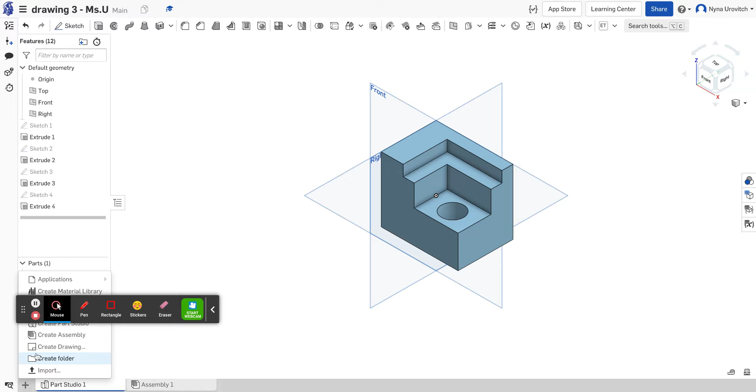So we're going to go to the plus sign in the bottom left corner, and you're going to go create drawing, and you'll go okay. We're going to select the part.

I'd like to spread these out nicely so we have plenty of room. We have the front view, the top view, the right view, and the isometric view.

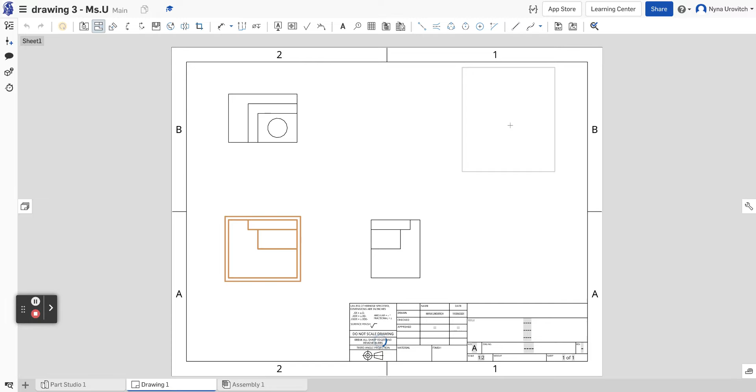We're going to start off by deselecting the projected view. Then you're going to go back to the isometric. We're going to right click and go show, hide, shaded view, and we're all set.

The next thing we're going to do is look for the hidden lines. So you're going to hover over the front view, right click, show, hide, hidden lines. And to the right view, show, hide, hidden lines.

Once there's no hidden lines for the top view, we're just going to continue and mark up the circles until we get all the center lines and center points.

We're going to go to the center mark and then you're just going to tap the outside of the circle, and there it is. Now we're going to go to edge center line for the hidden lines.

So I have one hidden line, another hidden line, one hidden line, another hidden line. Great.

The next step that we're going to do is we have to do the center lines across the circle. So here's one, here's two, and we just deselected the center line and our sketch is starting to look good.

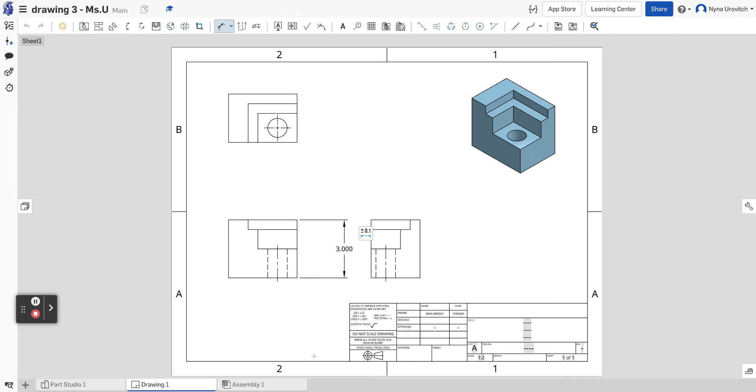So I'm going to go 3. I'm going to give myself plenty of space. And now I'm going to do 1.5 over here, and I'll do 1.5 or 1 over here.

Okay, so we just finished our first shape. And for our second, I'm going to do it across the bottom, again, to avoid the crossing of extension lines.

So we're going to do it from the top view. I'm going to start off with the overall width, and that's 3.5.

Then I'm going to go to the next one, that's 2. And I'm going to go to the last one, that's 1. And this one in between I did not dimension because we could figure it out.

But we do need to position the circle, which is 1 inch from the edge and 0.75 inches from the back. Okay, so now I'm going to do the depth.

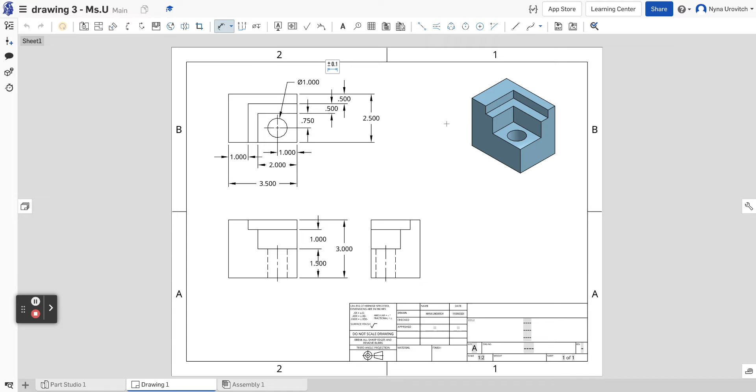And we managed to get everything on 2 drawings. So I'm going to exit dimensions, exit here, and I'm going to delete it. And this is our fully dimensioned sketch.